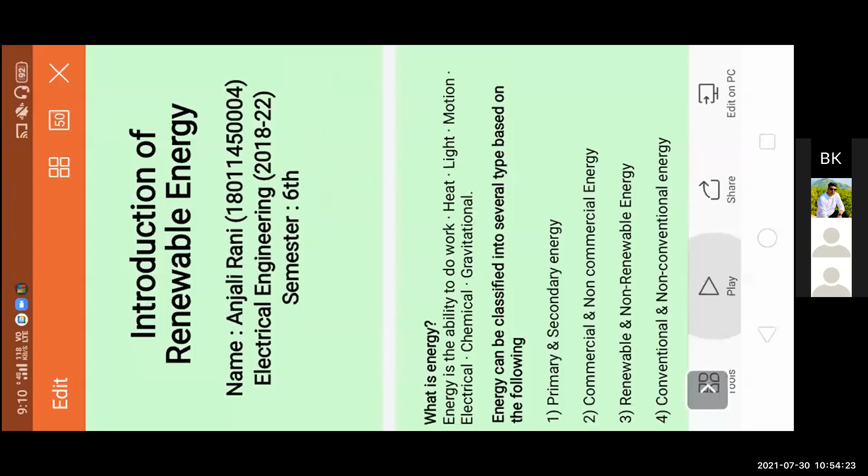Okay, everyone just follow up. However you have to give the presentation, be it on your laptop or otherwise, you may start. Okay.

Good morning, everyone. My name is Anjali, and I am here to introduce you to renewable energy sources. So, starting with the start, what is energy? In physics, we say energy is the ability to do work. It can be in any form: heat, light, motion, electrical, chemical, or gravitational. Energy can be classified into several types based on the following. First one is primary and secondary energy sources. Second one is commercial and non-commercial energy sources. Then renewable and non-renewable energy sources. And the fourth one is conventional and non-conventional energy sources.

So first, what is a primary energy source and a secondary energy source? Primary energy sources are those which are found in nature. Example, coal, oil, natural gas, and biomass, etc. And secondary energy sources are those sources which are costly converted in industrial utilities. Example, coal and gas converted into steam to form electricity.

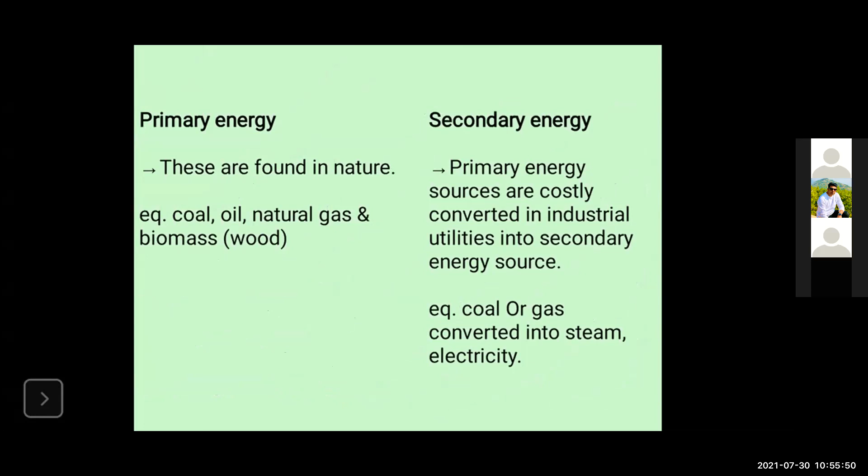Now, the commercial energy sources and non-commercial energy sources. Commercial energy sources are those that are available in the market for a definite price. Example, electricity, lignite, coal, oil, natural gases, etc. And non-commercial energy sources are those which are not available in the market and are traditionally used. Example, firewood, agro waste, solar energy for water heating, and wind energy.

Now, the renewable and non-renewable energy sources. Renewable energy is the energy obtained from sources that are essentially inexhaustible. Examples of renewable sources include wind power, solar power, geothermal energy, tidal energy, hydroelectric power, and biogas. The most important feature of renewable energy is that it can be harnessed without the release of harmful pollutants, whereas non-renewable energy is the conventional fossil fuels such as coal, oil, gas, which are likely to deplete with time.

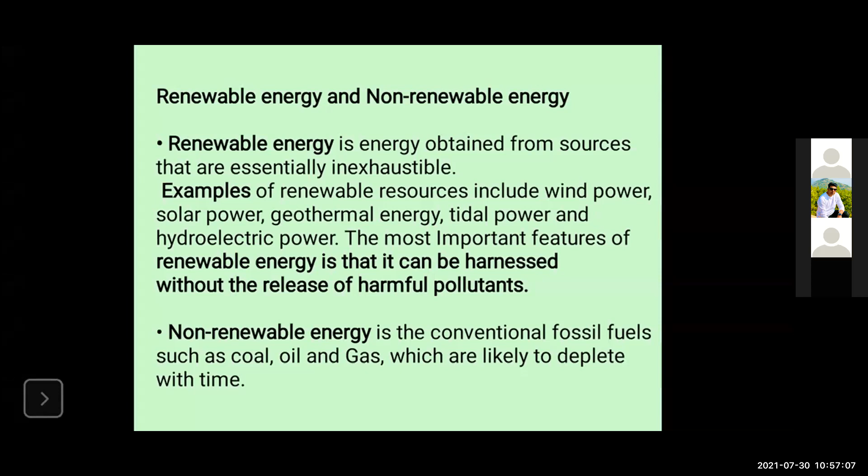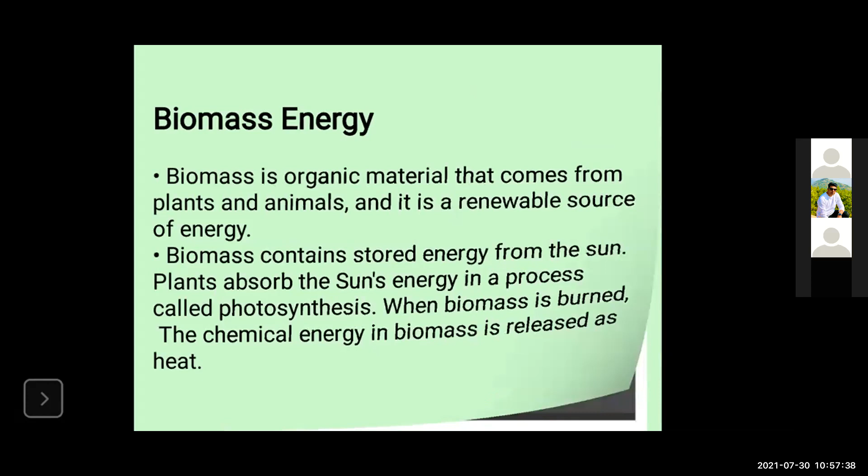So starting with biomass energy. Biomass is organic material that comes from plants and animals, and it is a renewable source of energy. Biomass contains stored energy from the sun. Plants absorb the sun's energy in a process called photosynthesis. When biomass is burned, the chemical energy in biomass is released as heat. Types of biomass: it can be wood fuel, rubbish, alcohol fuels, crops, landfill gas, etc.

Here is a diagram for biomass energy. We can see that there are various sources of biomass. Example, sewage, municipal solid waste, animal residues, industrial residues, forestry crops and their residues, agriculture waste, etc.

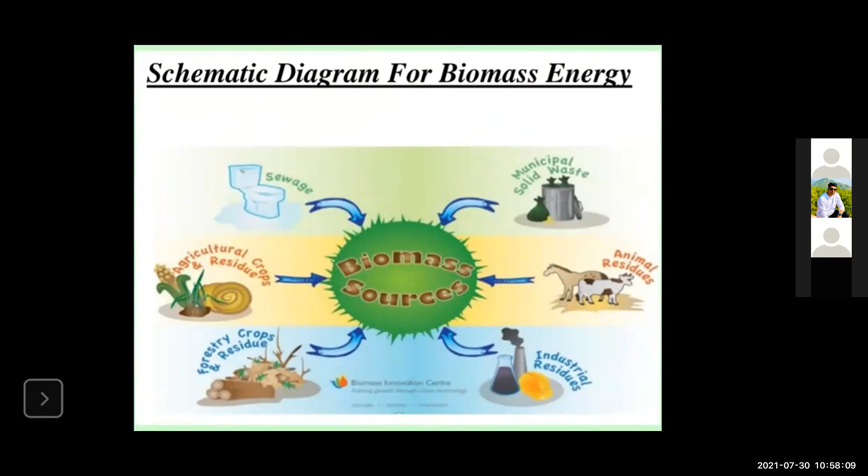Then comes the solar energy source. Modern residential solar systems use photovoltaic (PV) to collect the sun's energy. Photo means produced by light and voltaic is electricity produced by chemical reaction. Commercial residential PV modules range in power output from 10 watt to 300 watt in direct current. A PV module must have an inverter to change the DC electricity into alternating current energy in order to be usable by electrical devices and compatible with the electric grid.

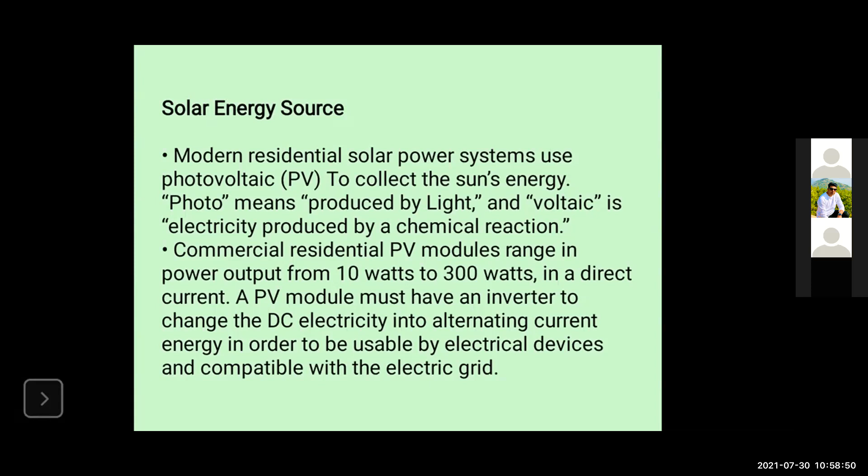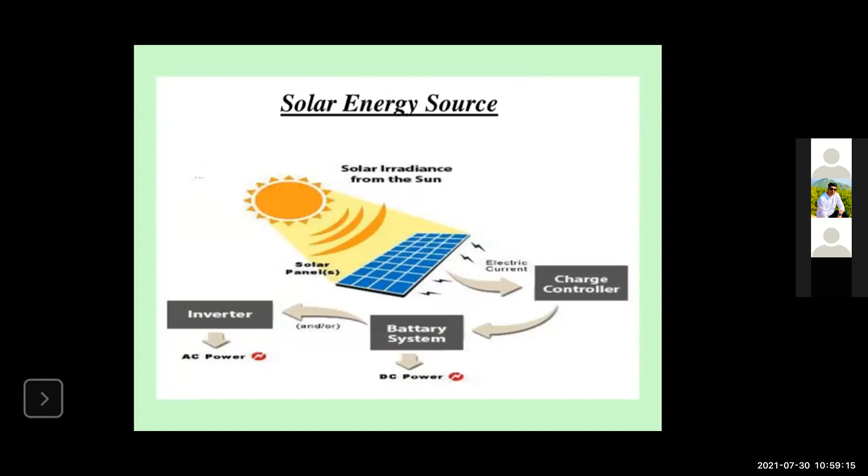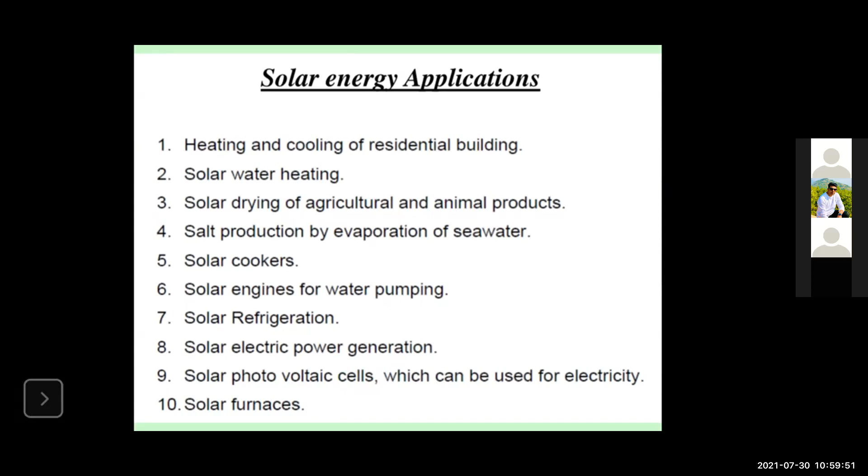Examples of some solar energy applications. First one is heating and cooling of residential buildings. Second is solar water heating. Third one is solar drying of agriculture and animal products. Fourth one is salt production by evaporation of seawater. Then comes solar cooker, and sixth one is solar engines for water pumping. Then solar refrigerators, solar electric power generation, solar photovoltaic cells which are used for electricity, and then there is solar furnace, etc.

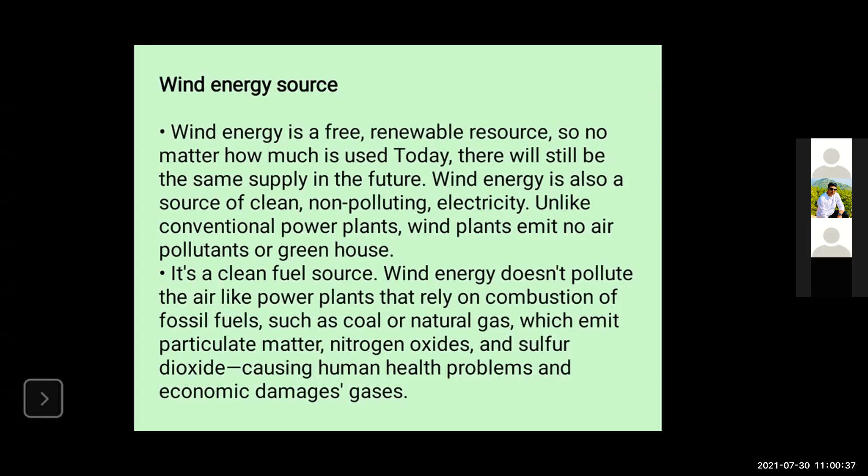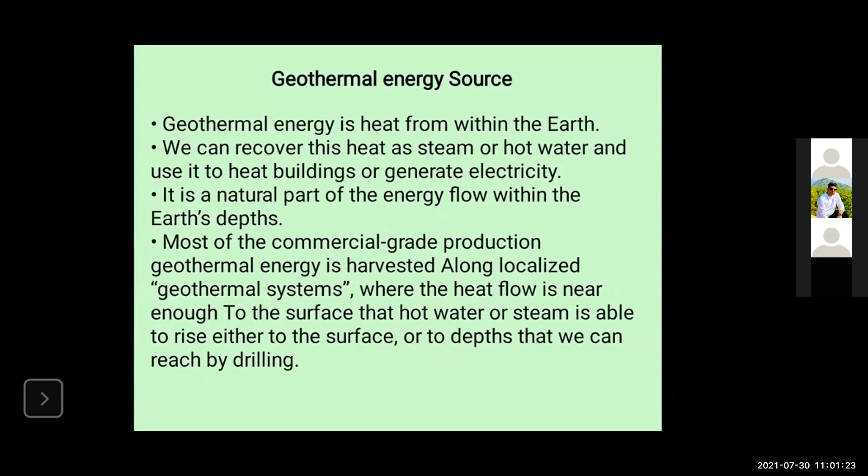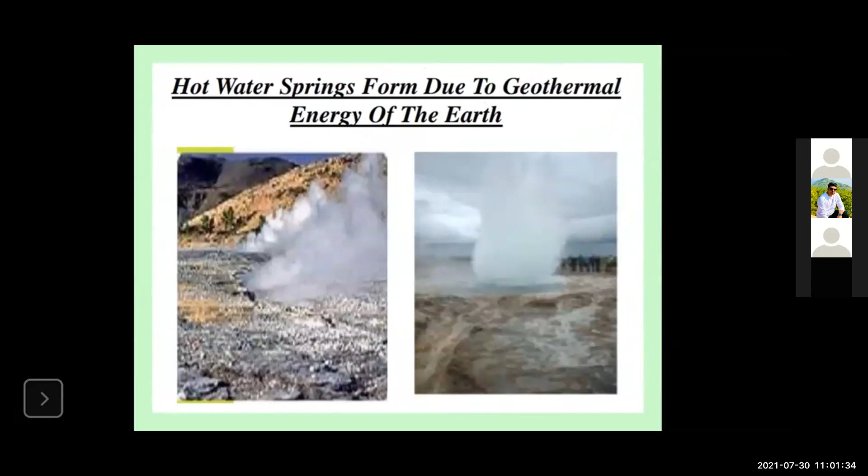And then we have tidal power. Tidal power or tidal energy is a form of hydropower that converts the energy obtained from tides into useful forms of power, mainly electricity. Tides are more predictable than wind and the sun. Among the sources of renewable energy, tidal energy has traditionally suffered from relatively high cost and limited availability of sites with sufficiently high tidal range or flow velocity, thus constraining its total availability.

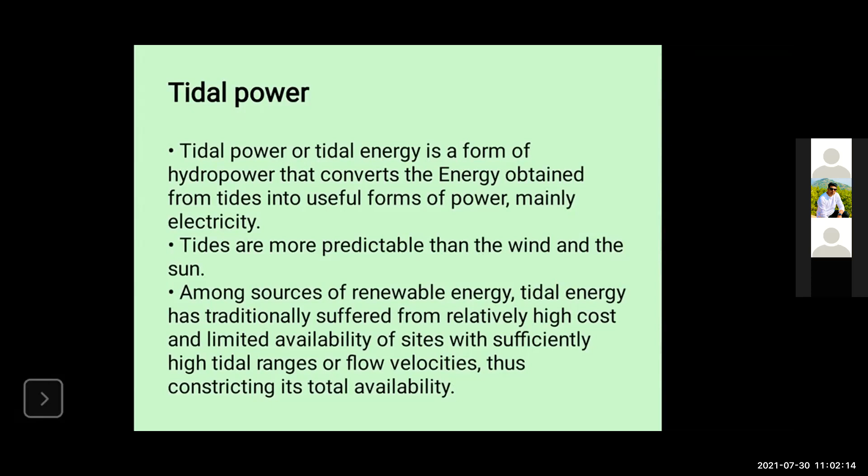So again, biomass is a renewable source of energy that is derived from living or recently living organisms. It includes dead plants, tree branches, rotting garbage, agriculture, and human waste like sugarcane, grasses, or wood chips. Energy derived from biomass is mostly used to generate electricity or to produce heat. Biomass is found easily all over the world. It can be chemically or biochemically treated to convert it into an energy-rich fuel.

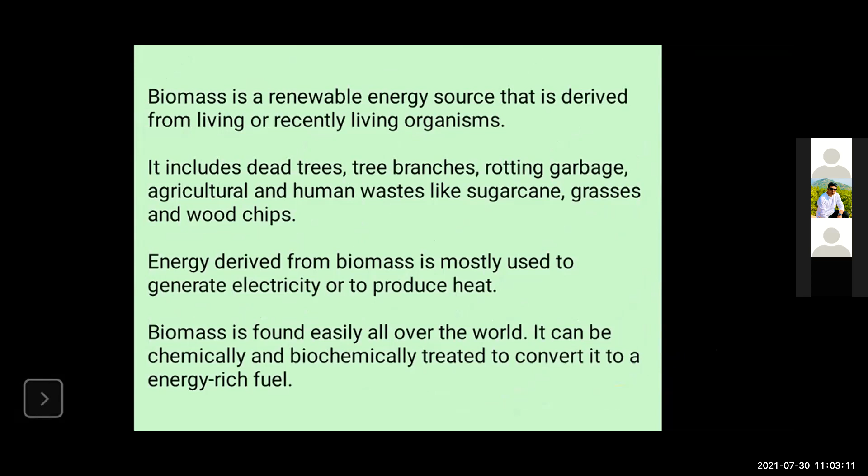Why biomass? Biomass provides a clean, renewable energy source. Biomass energy generates far less air emissions than fossil fuels. Unlike combustion of fossil fuels, carbon dioxide released by biomass is balanced by carbon dioxide captured in the recent growth of the biomass. So there is far less impact on greenhouse gas levels.

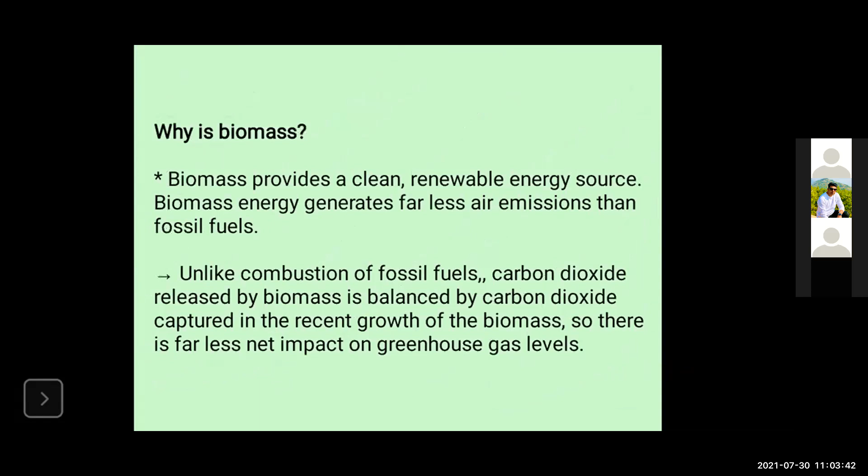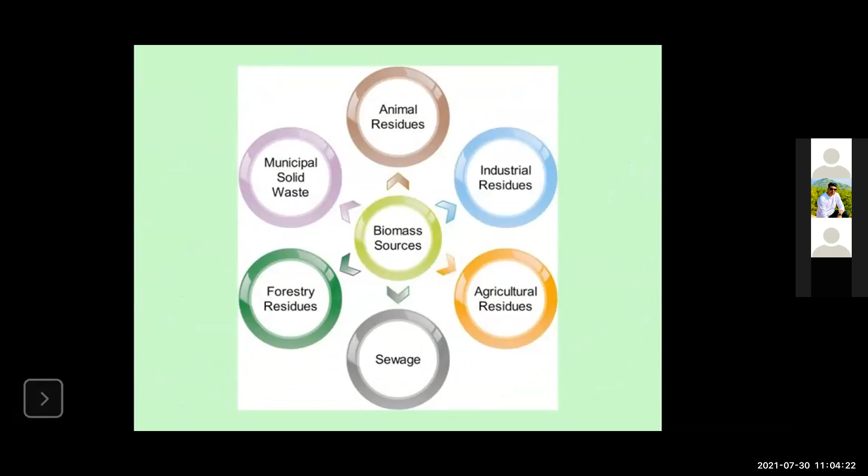How biomass is produced. Producing fuel and energy from biomass is complex but corresponds directly to photosynthesis. Photosynthesis is a chemical reaction in which carbon dioxide and water are transformed into oxygen gas and glucose through the input of energy from the sun. Plants become autotrophs because they use glucose as a source of energy rather than fossil fuels. Biomass is manufactured from crops, wood, manure, landfill gases, and alcohol fuels.

Biomass can be converted to other usable forms of energy, such as methane gas or transportation fuels such as ethanol and biodiesel. Crops like corn and sugarcane can be fermented to produce ethanol, and biodiesel, another transportation fuel, can be produced from leftover food products like vegetable oils and animal fats.

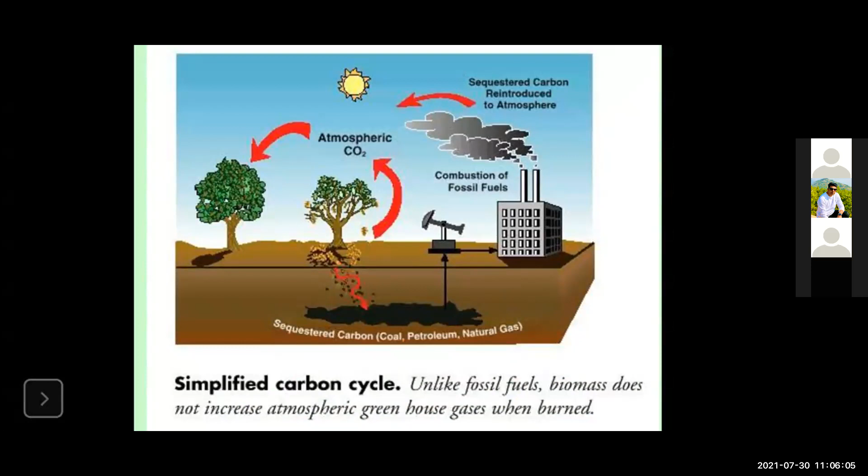Here is a diagram of the carbon cycle. Here we can see that a tree uses carbon dioxide from the atmosphere and nutrients from the soil and goes through the process of photosynthesis, and the carbon released by industry is also used by the plants to keep their photosynthesis process going. Types of biomass: garbage, crops, wood, landfills, alcohol fuels.

And then we are going to discuss what biofuels and biodiesel are. Biofuels are created from vegetable oil or animal-based oil, for example canola, soybean oil, palm oil, grease, sewage, or leftover trash. They are used as fuels for vehicles. Biodiesel is also a type of fuel created from vegetable or animal oils, but it can often be blended with regular diesel. Biodiesel is a cleaner alternative to diesel, but not all vehicles can use it. Basically, we can say these are an upgraded version of vegetable oils.

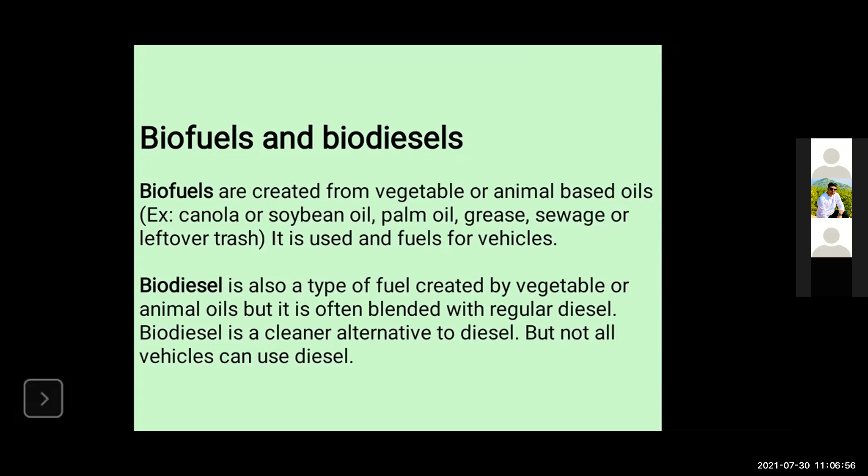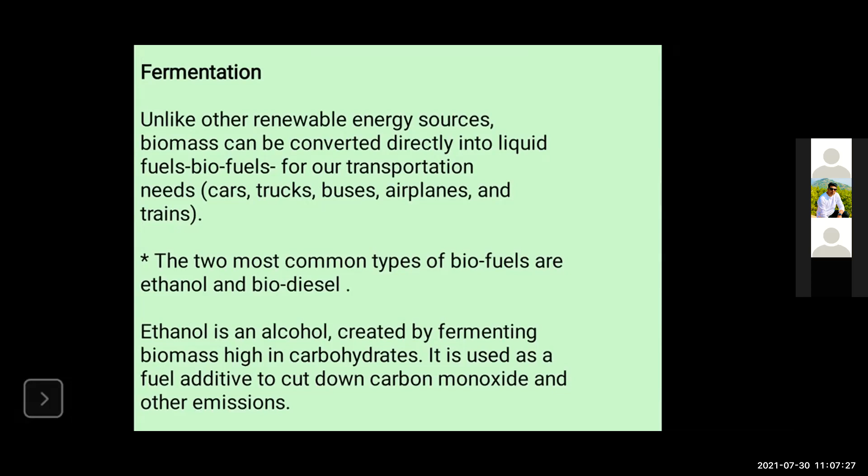Unlike other renewable energy sources, biomass can be converted directly into biofuels for our transportation needs: cars, trucks, buses, aeroplanes, and trains. The most common types of biofuels are ethanol and biodiesel. Ethanol is an alcohol created by fermenting biomass high in carbohydrates. It is used as a fuel additive to cut down carbon monoxide and other emissions.

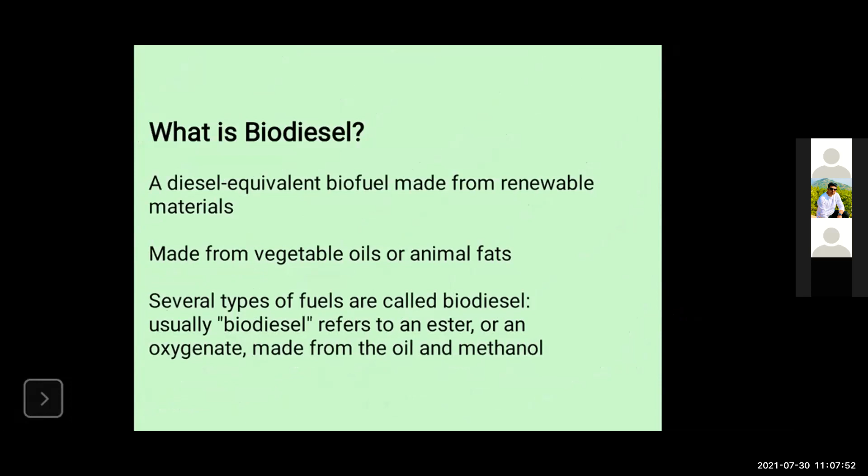What is biodiesel? A diesel equivalent biofuel made from renewable material, made from vegetable oils or animal fats. Several types of fuels are called biodiesel. Usually, biodiesel refers to an ester or an oxygenate made from the oils and methanol. In other words, biodiesel is a fuel made primarily from the oils and fats of plants.

Although it can be used as a straight replacement for diesel, the blend of biodiesel to diesel can be as low as 20% biodiesel, 80% diesel. How is it produced? Biodiesel can be produced through a transesterification process forming fatty esters. One of the byproducts of production is glycerol, which can then be sold as an independent product.

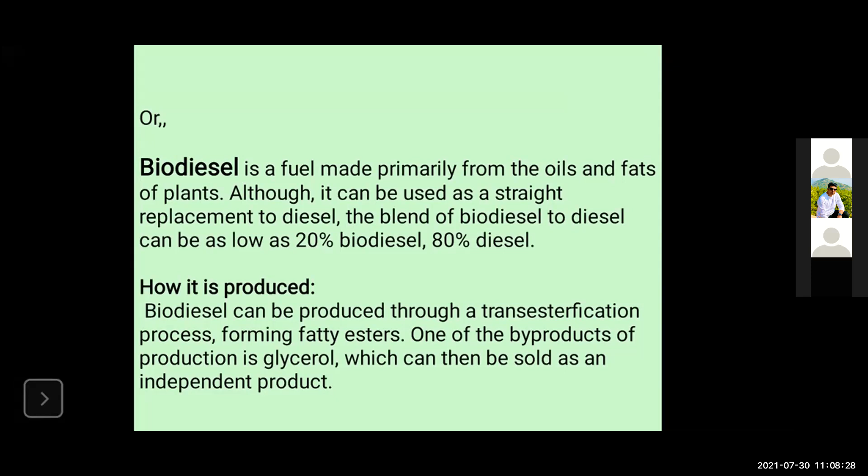Properties of biodiesel. The physical and chemical properties of biodiesel are similar to those of petroleum diesel. Moreover, it is environment friendly, non-hazardous and biodegradable. The application of biodiesel ranges from transportation vehicles to farming equipment to industrial machinery.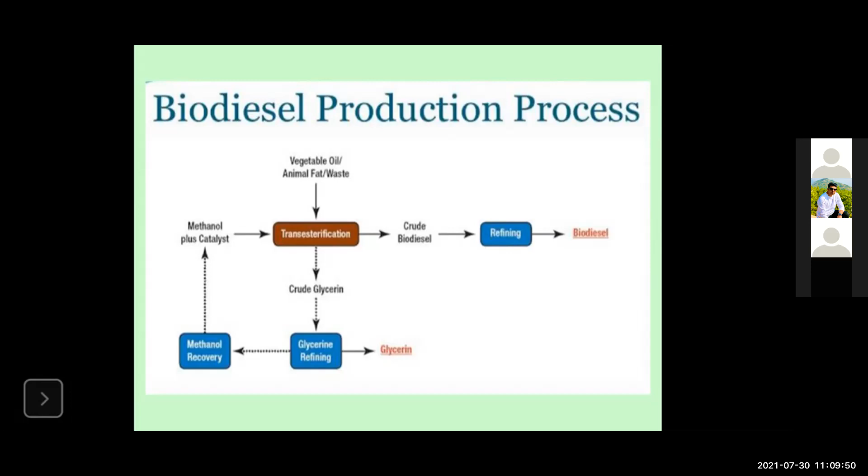Sustainable biofuels and economic development. Incorporation of the biofuels industry into national development plans can contribute to achieving the country's overall development objectives. The biofuel industry allows community participation, including local farmers. Biofuel offers a sustainable development option that is full of promise and developed in ways that protect our planet.

Advantages of biomass. The main advantages are: biomass is a renewable fuel source, biomass energy production results in minimal environmental impact, it generates employment in rural areas, alcohol fuels are efficient and clean burning, and the availability of biomass fuel is universal.

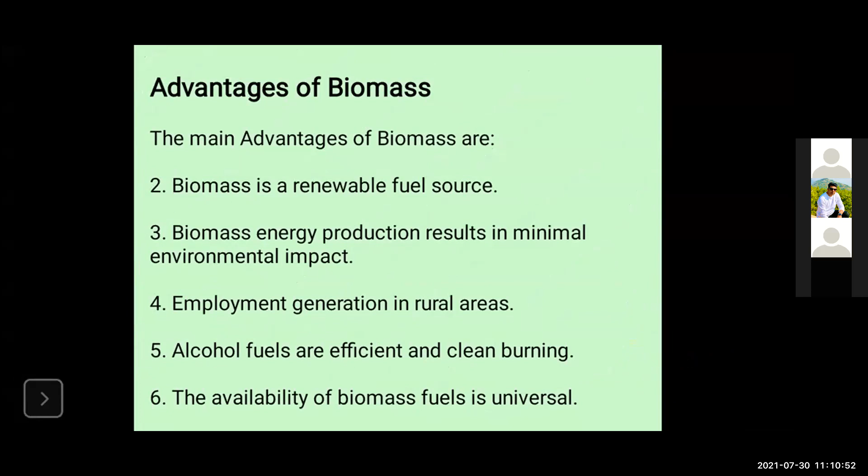Now some disadvantages of biomass. It is quite expensive to make, we haven't found a way to store the energy, and it also requires more fuel and more land.

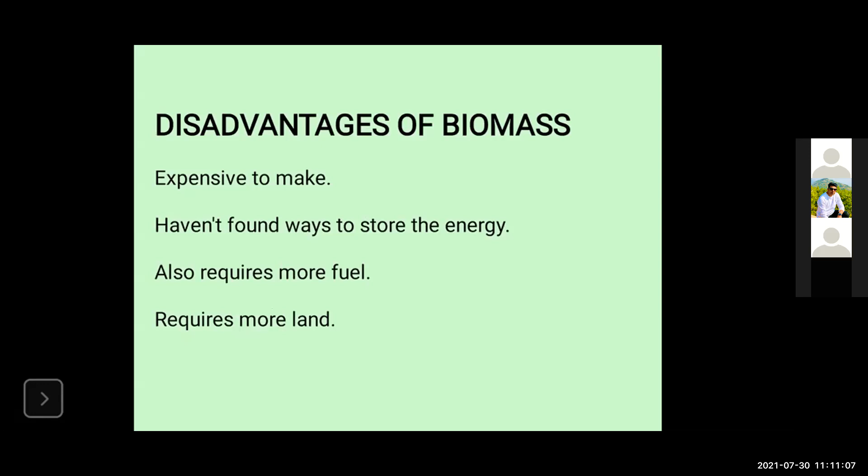Now, biomass and carbon emission. Biomass emits carbon dioxide when it naturally decays and when it is used as an energy source. Plants and trees absorb carbon dioxide from the atmosphere through photosynthesis. Biomass causes a closed cycle with no net emission of greenhouse gases.

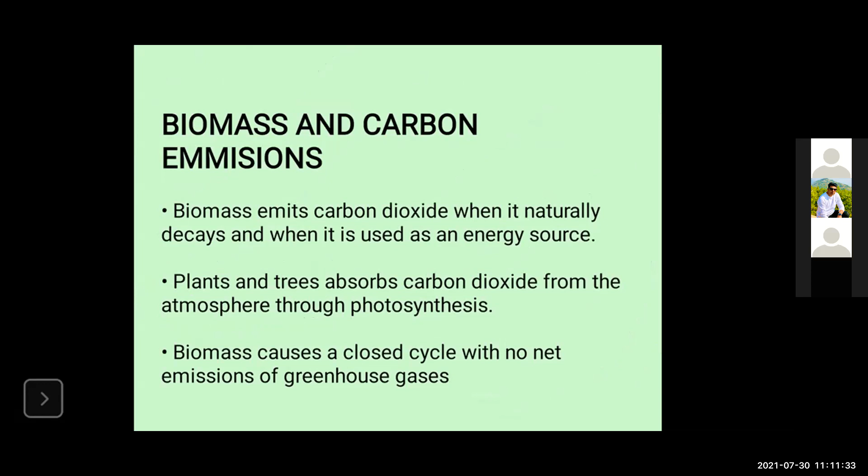Future of biomass. Biomass is a renewable energy source because we can always grow more trees and crops, and waste always exists. Biomass is a great option for the energy of the future. Technology improvements will increase biomass energy, as the world becomes more able to use its waste, more biomass.

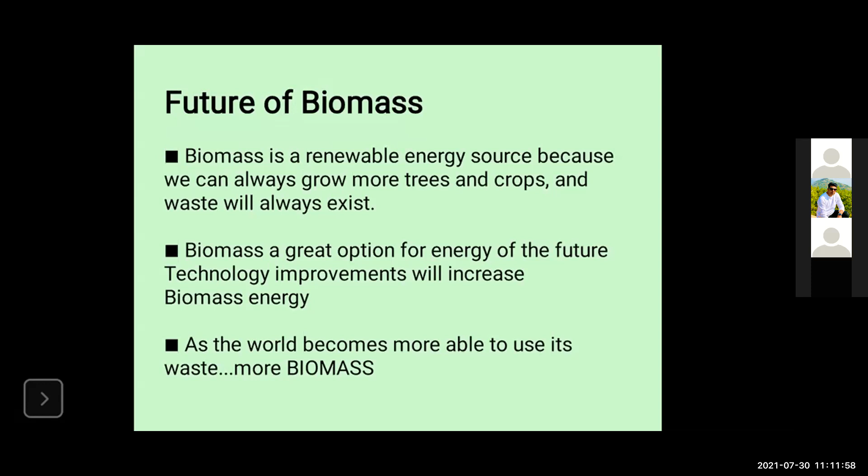And finally, the conclusion. As there appears to be a general agreement that the era of cheap oil has ended, it is essential for India to look for alternative renewable fuel options such as biofuels, biodiesel and bioethanol to provide energy security and environment protection.

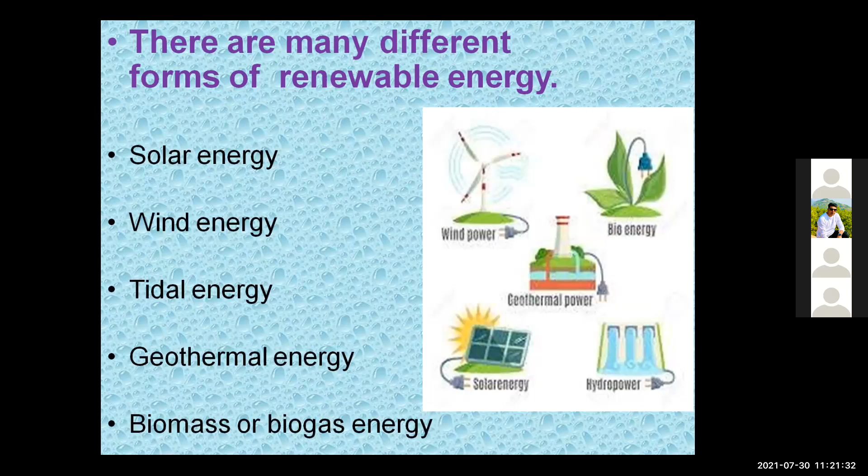So let's start. There are different types of renewable energy sources: solar energy, wind energy, tidal, geothermal, and biomass. Let's go one by one.

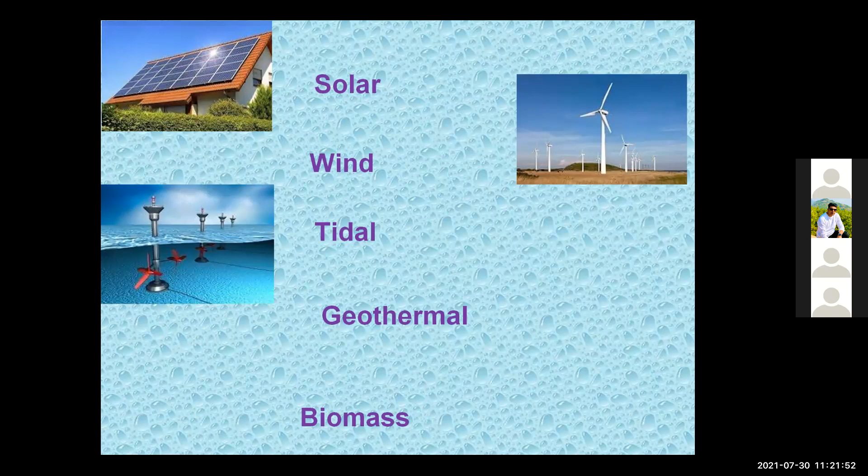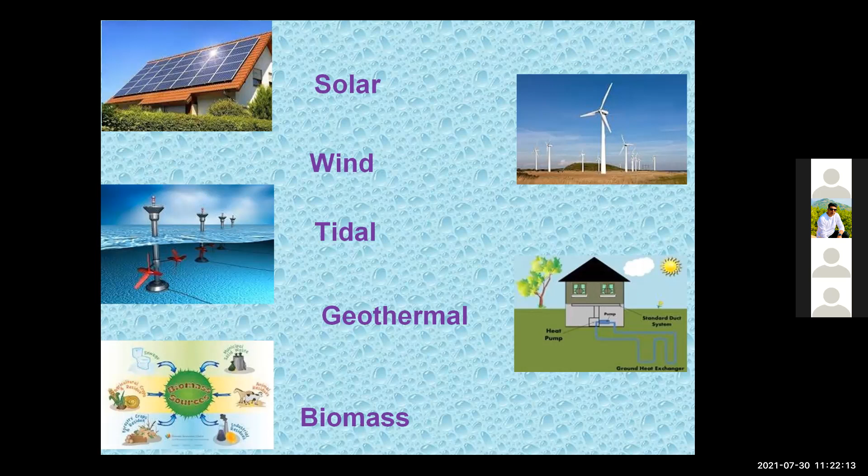This is a preview diagram showing how a solar power plant looks. This is solar power plant, and this is wind power plant, where we use windmills to generate electricity using wind. This is tidal power plant, where we use tides of the ocean waves. And this is geothermal, which as the word suggests means the heat of the earth. Finally, there is biomass power plant, where we use cow dung, buffalo dung, and food waste.

Let's start with solar power plant. Solar energy is the energy the Earth receives from the sun, primarily as visible light and other forms of electromagnetic radiation. In this power plant, solar energy can be converted into electrical energy using solar plates. Here we use solar arrays, which are a combination of solar modules and solar panels, and basically a solar cell, which is a PV cell or photovoltaic cell.

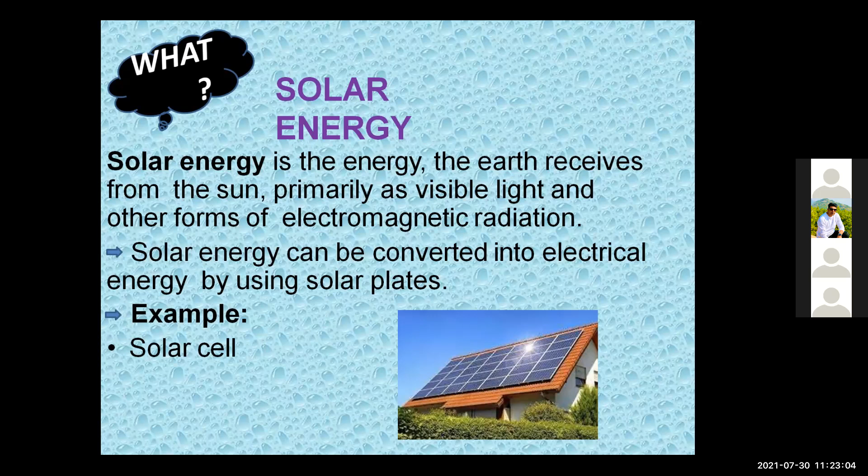It is made up of silicon, and silicon is made by heating carbon with sand at around 2000 degrees Celsius, so we can get silicon. This is the basic diagram of how a solar power plant works.

We use a solar panel here, and within the solar panel there is a process happening, called the PN junction process. When sunlight comes to the N type, that is negative type, the electron tries to pass through the P-N junction or depletion zone. But the depletion zone is full of electrons, so it cannot pass.

So by using another way, we pass the sunlight into the P type, and throughout this journey, if we use any bulb, that bulb will glow because of the flow of electrons. We know flow of electrons is current, and that current is basically DC, direct current. By using direct current we cannot use our home appliances, because they are AC appliances.

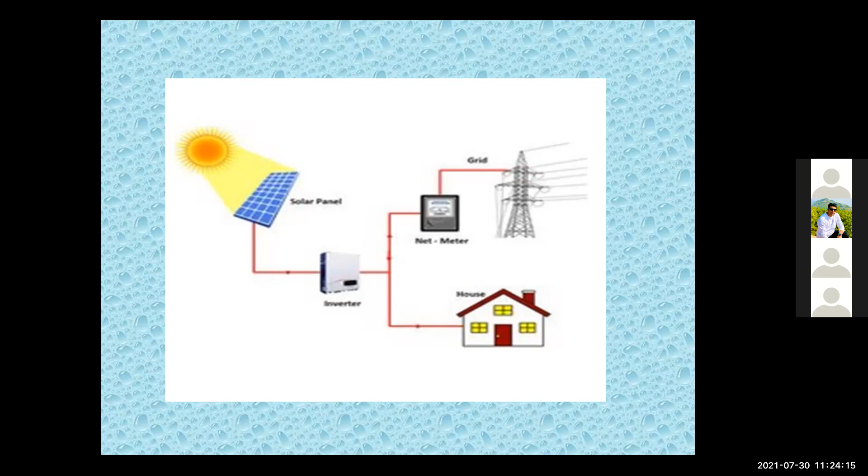So by using an inverter we convert that DC into AC, and we can use it in homes as well, and in the substation we can store it for further use.

Now let's come to the wind turbine, wind power plant. Wind power is a good, renewable, clean, and free source of energy for power production. It reduces the dependence on fossil fuels, including imported oils. If we talk about coal power plants, which are non-renewable or conventional, there we use lots of coal. Here we don't need any coal, uranium, or other things. By using wind we can generate power here, reducing emission of greenhouse gases and other pollutants.

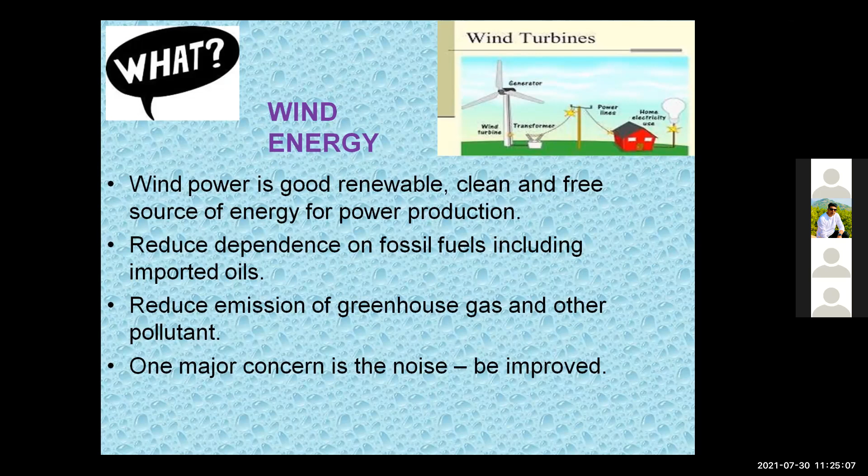One major concern is noise, but it can be improved. In coal power plants there is lots of pollution produced, so they are not eco-friendly. This wind power plant is eco-friendly; here there is no pollution.

So this is the working diagram of the windmill or wind power plant. Here there is a rotor. Let me tell you the whole construction in detail. Here there is the rotor hub, and this is the blade. When the blade rotates, the spindle rotates, and then there is one gearbox.

The work of that gearbox is related to how electricity is generated fast or in large amounts, since people generally think blades rotate slowly. But in the inner construction, our engineers have made it so that when, like in a cycle, the pedals move and the cycle wheel moves faster, the ratio is 1 to 20. In this windmill, the ratio is 1 to 100. It means that when the blade of the windmill rotates one round, the inner gearbox containing that rod, which is connected to the alternator, will rotate 100 times. Its ratio is 1 to 100. That's why we can get a large amount of electricity by using a windmill.

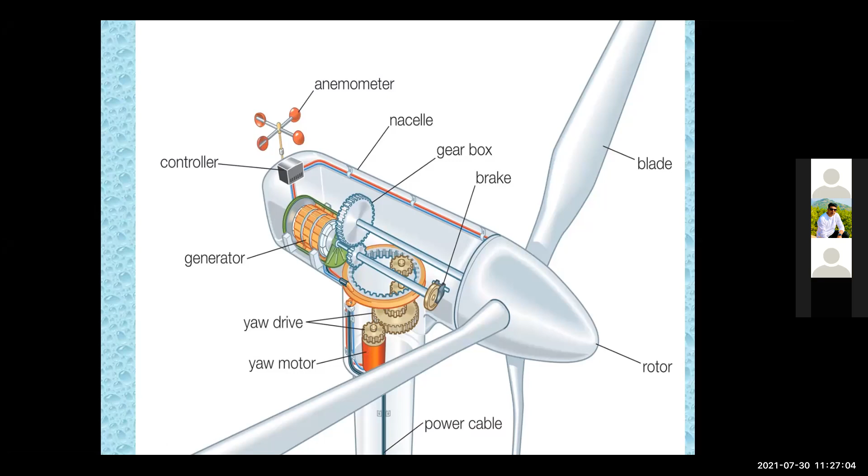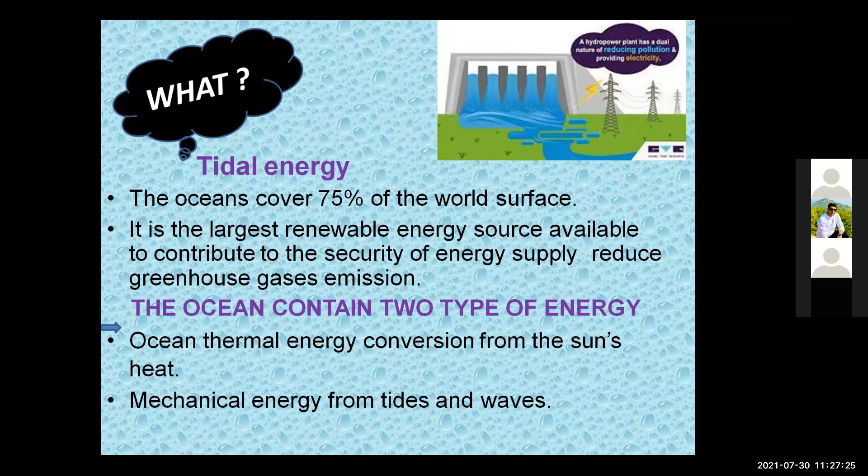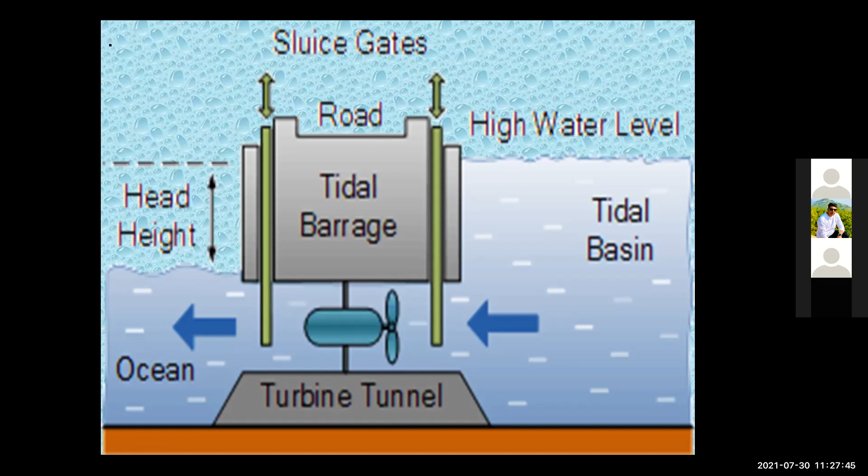Okay, now let's go to the tidal power plant. The ocean covers 75% of the world's surface, so by using this we can also get a large amount of electricity. By using ocean waves, we rotate our turbine. In this figure, it clearly shows that when tides come into this tidal barrage, the turbine will rotate, and the turbine is connected with the alternator. When it rotates, our alternator will also rotate, and by using Faraday's law, our alternator will produce electricity, because the principle of the alternator is that it converts mechanical energy into electrical energy.

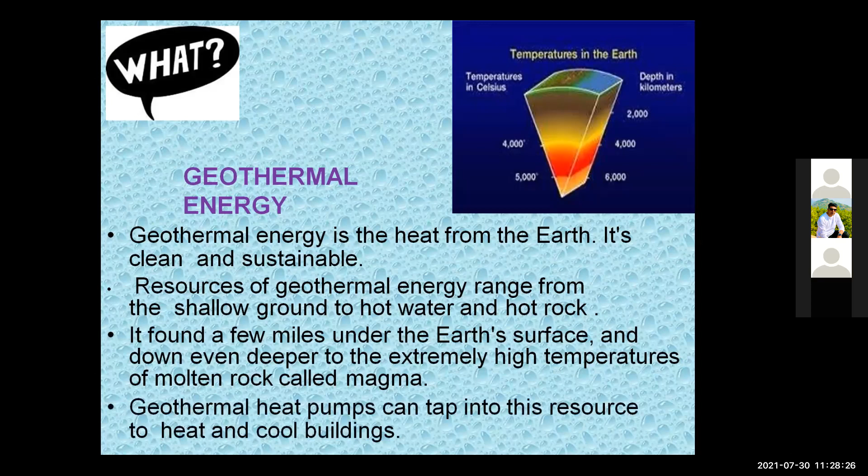Now let's go to the geothermal power plant. Basically, geothermal energy is the heat from the earth. It's clean and sustainable as well. Resources of geothermal energy range from shallow ground to hot water and hot rock. It means that when we go deeper into the earth's land, further kilometers down, there is a large amount of heat present, and the magma core is also there.

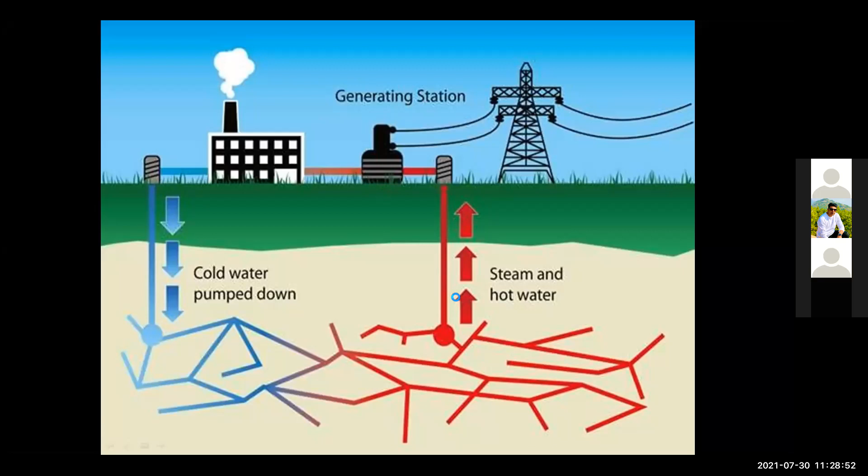So this is the working diagram of the geothermal power plant. Here we put cold water in through these blue arrows, and due to the geothermal heat, that cold water converts into steam and hot water. This hot water goes to the turbine, and our turbine rotates and produces electricity. This was the basic diagram of the geothermal plant.

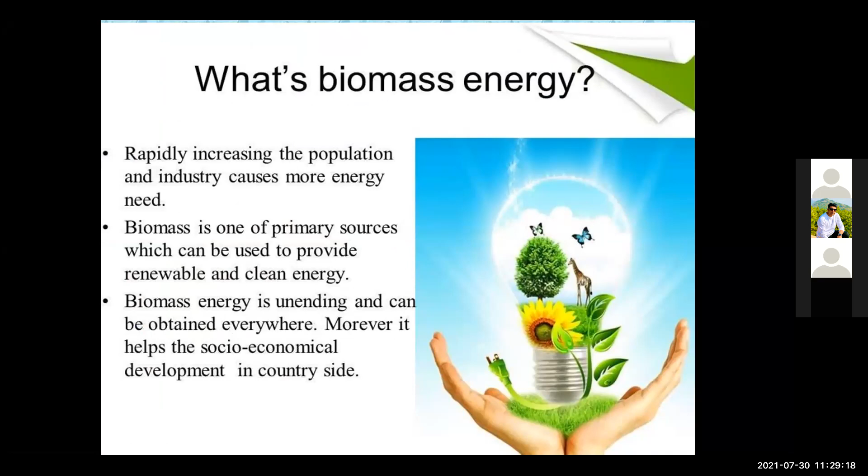Now let's come to biomass energy. Here in biomass energy we use cow dung, buffalo dung, food wastes, animal waste, and agricultural waste as well. By using this we heat these types of wastes, and electricity is generated through the heated steam. In biogas we use that biogas. Let me show you the full diagram of biomass so you can understand.

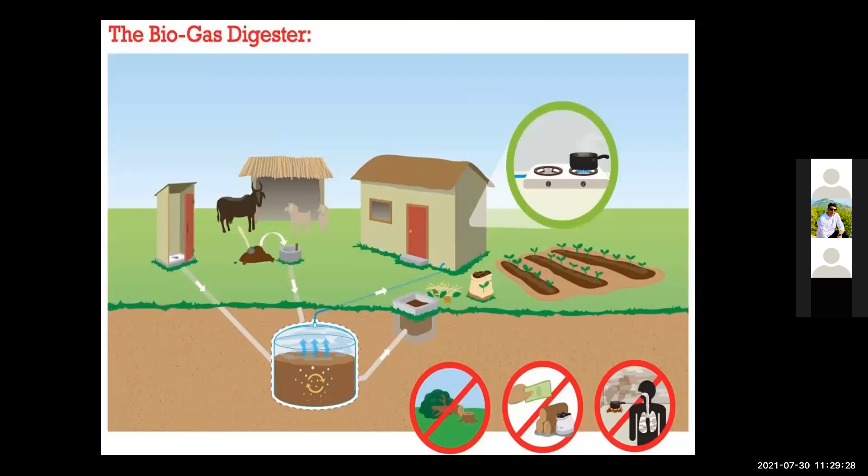Here is the diagram. In the slurry inlet we put cow dung mixed with water. We mix it here in the slurry tank. After that we transfer the slurry tank into the digestion tank, which is in the middle. Here we store the slurry for approximately 50 to 60 days, and after digestion, gas is emitted.

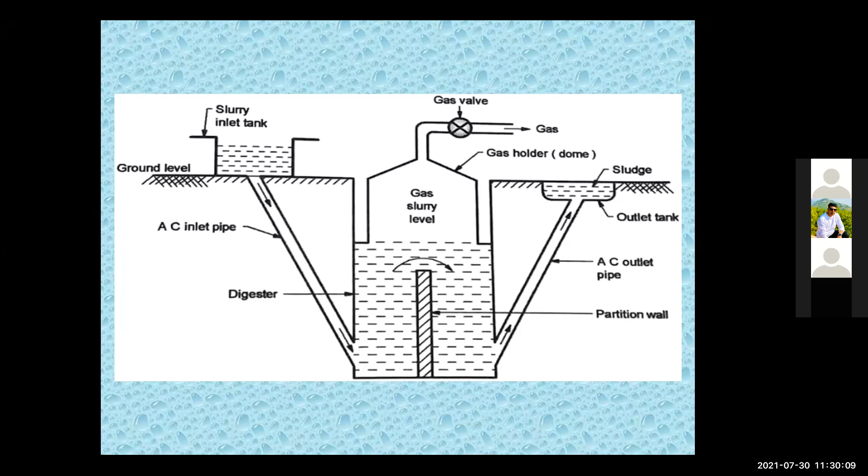Then the gas valve passes that slurry gas, and due to the slurry gas we heat it and pass it into the turbine, and our turbine will rotate, and in this way we can get electricity. And from the waste materials, apart from that steam, slurry...